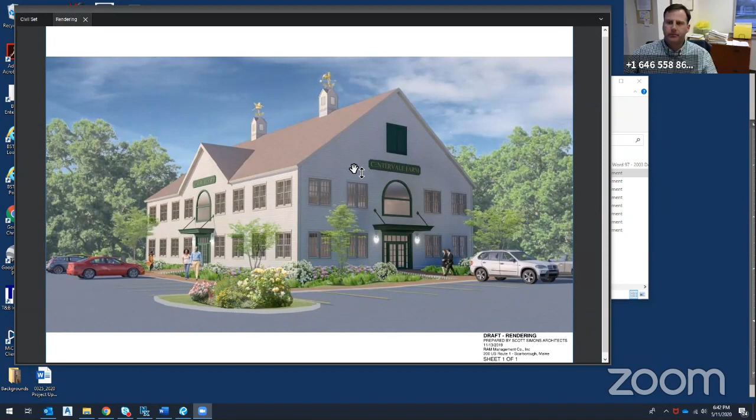Do you see the Centervale Farm building? Yes, we do. Great.

Going through the majority of the changes: the southern drive was previously a full access driveway. We've worked with our traffic consultant and made that a right-in only, configured so no one can take a left into the site or exit that way. We've also added a sidewalk along Route 1, which we'll get into more, and that's been added to the plans.

This area back here was previously just striped. We've now made it a 4 feet wide, 6 inches high raised sidewalk. On either entrance we added benches and bike racks per the comments. We also extended the screen fence further down per an abutter's request, and raised it from 5 feet to 6 feet.

We've been working with the town engineer and Woodard and Curran on comments related to the stormwater. We believe the majority of those have been addressed, and we did a whole traffic study that was submitted as part of the package.

There are a few still outstanding items and revisions to be made. Some of those are already done, and some we'll get in for the next submittal. One is the stormwater comments — we believe those have now been addressed, not on the set you have, but we've continued working on it since. For elevations, color and material will be added to the rendering.

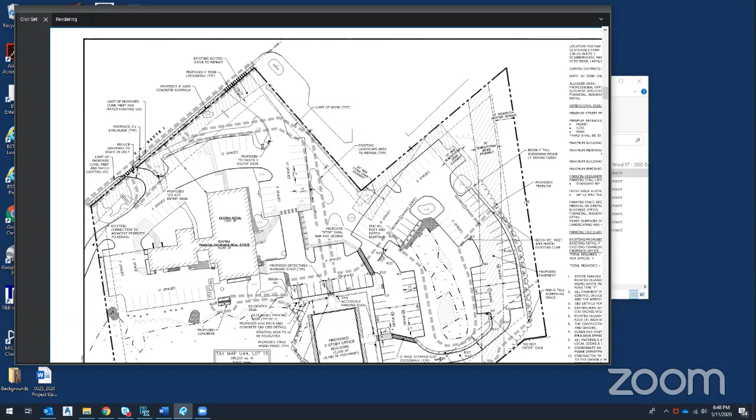People have been doing it from the existing building since it was built in the early 90s without ever having an incident. The number of additional people joining the other building and the additional cars and traffic in and out is unlikely to create a problem if we stripe it properly, which we'd be prepared to do.

All right, that's my discussion. Thank you. Glad to answer questions, but that's my discussion.

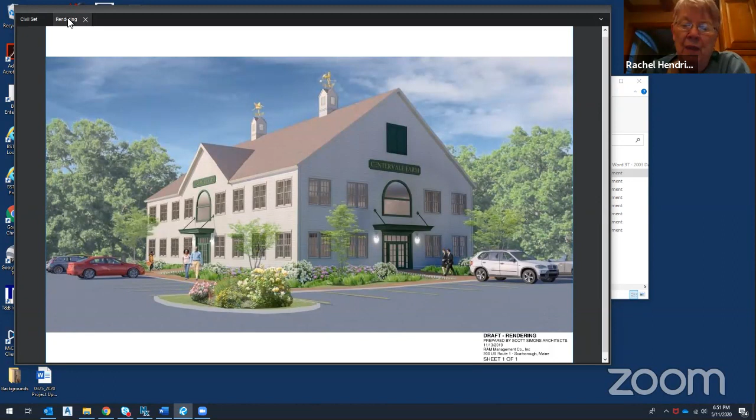That's our intention, to do it exactly the same - the roof materials, the siding, et cetera. Then I think that needs to be mentioned, it needs to be on the plans what it is. I need to see the back and the side of the building, because we do look at all of the elevations. That's all I have.

Thank you. May I ask, Rachel - I thought that was on an earlier plan? We had added a note before, but I believe the board's looking for something on this architecture plan. It's going to call out some of the materials and the colors. Okay, that's easily done.

Roger: Sure. First, I think it's going to be a very attractive piece of property when it's all done, and I like the fact that the building's going to basically replicate the existing building. I want to get a clarification on the access and egress points here, just for my own sake.

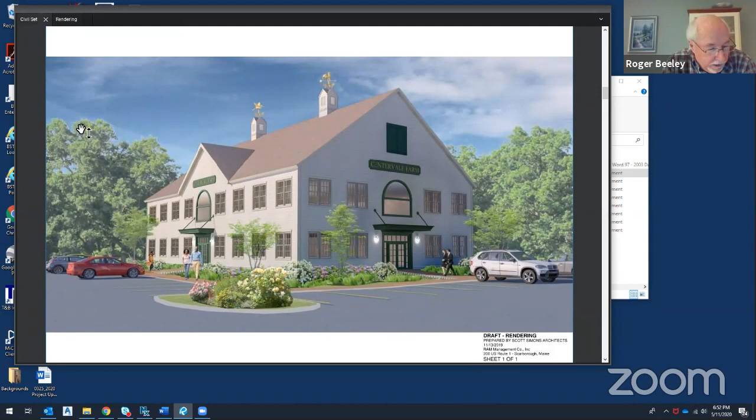I understand the southbound entry from Route 1 is going to be an entry only. The driveway on the northern portion - is that going to be both ways, in and out? That would be full access: right in, right out, left in, left out. Okay, and then the roadway going towards the bank.

Is this interconnection just one way? That is, it's a one-way exit towards the traffic. Okay, and is there signage there right now?

There's an indicated stripe area, and there's a one-way arrow that is maintained. That's not our property, that's the property of the bank and Starbucks, but there is a one-way arrow that was put in when it was originally built by the bank.

But right now, if there are vehicles on your property, they can exit through there. That was a requirement made by the town when they were developing the property next door. Okay, good.

Based on the current landscaping of the existing property, I feel very confident that the landscaping around the new building will be very similar. I don't see any reason why it wouldn't be, but I understand the need to have the information. I guess I don't really have anything further to add.

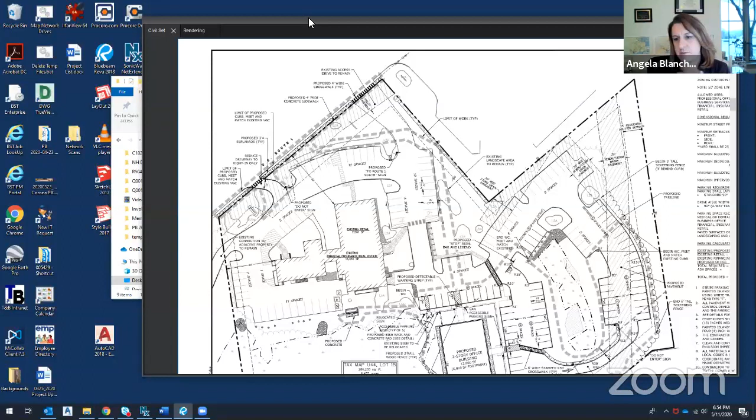Thank you. As John talked about, there are utility poles along Route 1, so he's trying to work within that 7 feet, and as Roger said, they also have landscaping behind that. So I'm sure that's part of the issue too, not wanting to go into the sidewalk easement. Is that part of the issue as well? It's really just confined to the 7 feet, correct?

Correct, there's some grading issues, there's landscaping, there's signage. The thought is, as John mentioned, when you get an esplanade that's less than 4 feet, it really doesn't survive, especially along Route 1, and becomes just dirt. They've spent a lot of time, effort, and money on this property and the landscaping that looks really nice. I'd hate to have a dirt patch in the front.

So one of the things we talked about as staff is maybe, in lieu of having that esplanade, moving that sidewalk along the curb line. The problem then becomes winter operations and the snow plows going down the sidewalk. So in that case, I was hoping we could get to a point where you have the 5.5 foot, face-of-curb sidewalk.

So a snow plow can go down, but then have to bump out, and you can taper it out around some of those sidewalks, so it almost becomes more of a meandering sidewalk, but actually paving that in so you don't end up with dirt patches. Just because of the salt use along Route 1, sand and salt, it's very difficult to keep any kind of vegetation along that stretch.

One question I did have on that piece, maybe for Angela, I'm not sure. The recommendation was to go to an exclusive pedestrian phase for this light due to some conflicts for people crossing from a certain direction, which sounds like a good idea to me for a short-term fix. But I was just curious if there's any thought to what kind of monitoring we might do to that over time, or over a predefined amount of time, just keeping an eye out for the mainline Route 1 functions and whether or not we'd have any ability to tweak that down the road if it turns out to be problematic.

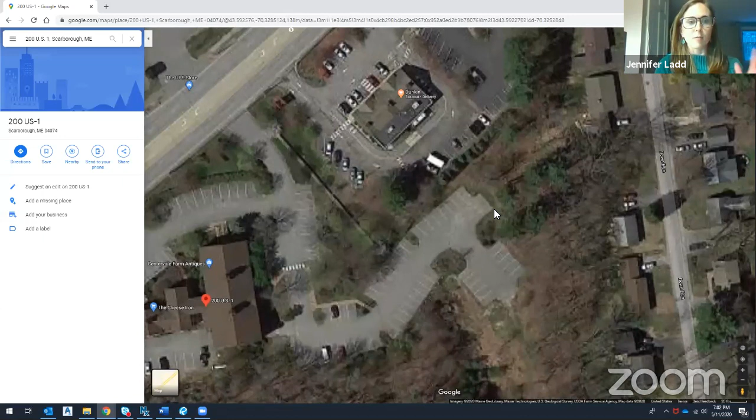So for example, the scenario given is that it's safer to have the exclusive ped phase to allow pedestrians to cross this intersection with no other vehicle movements happening at the same time. That comes at the trade-off of Route 1 functionality, and if someday this becomes a much more frequently used ped phase, that could have longer implications. So I was just wondering, from the town's perspective, or the applicant's, what does that look like longer term?

Yeah, you're right, Jen. We've had a lot of conversations about a lot of the Route 1 signals regarding having an exclusive ped phase or not, and it really starts monkeying with the mobility of the corridor. This intersection in particular, that one crossing for peds has been very problematic, and we've talked about doing a lot of different things. If that's the route we go with, it would be a very short term fix - I don't think that's the solution for that intersection. It's really about trying to make that a safe crossing rather than just stopping all traffic to let a pedestrian across.

So in the background, staff has been looking at this intersection and studying it, trying to figure out a list of improvements that should happen over time at that intersection. It's really about finding opportunities to partner and work with those contributing to that intersection and try to resolve that.

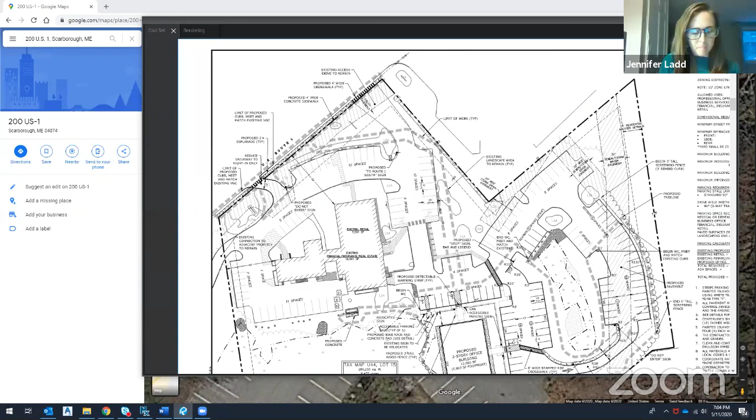The only other thought I had was potentially trying a leading pedestrian interval for a little while, but if you're having extensive conversations about that, I'm pretty sure that probably came up.

The other topic, on the internal sidewalk, I do appreciate the extensive and in a lot of places really mature landscaping on this site, but respectfully disagree that it's impossible or really difficult to construct a safe pedestrian connection out to our major thoroughfare.

I guess I would look forward to it, it doesn't jump out to me on this plan about what your planning scheme or your plan for making that connection is. If it's not a dedicated sidewalk on site, then what is it? This plan doesn't really show that.

I feel like safe and ADA compliant pedestrian access has really come more to the forefront than it was probably in the 90s, or even a few years ago. So it would be, in my opinion, a great lost opportunity in this case to overlook or bypass that opportunity.

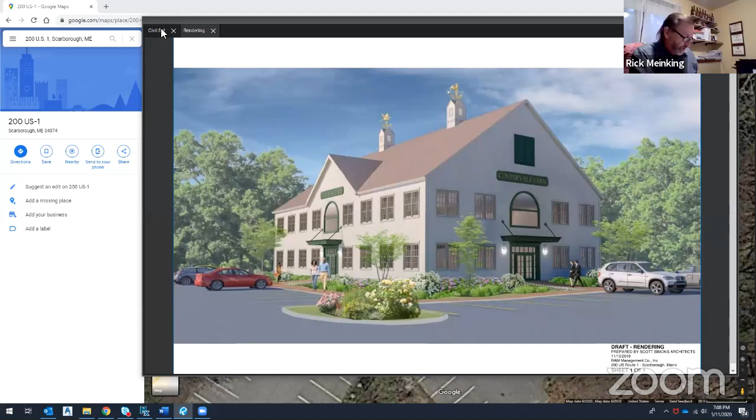you hook into what is existing. I mean, we're talking no candle power at all. And I know we're going to relook at this and submit cut sheets, but we really need to address this, I just don't think you have the coverage here.

And when you do resubmit for your lighting plan, I would ask that you show the interactive effects between this new area and the crossover sections of the existing, because that may be able to solve some of the issue.

I think one of the issues is your lights aren't very high, and they probably are fairly low in lumen output. I don't want to really change the character, but at the same time, I don't want to compromise the safety of those people that are going to enter and exit during the dark hours. So I would ask that you take a real good look at that.

It might be helpful if you add the calculation summaries and divide them into certain areas, specifically the new parking area and the parking area that abuts the proposed building site. Let us take a look at that for the next submission. Okay, that's all.

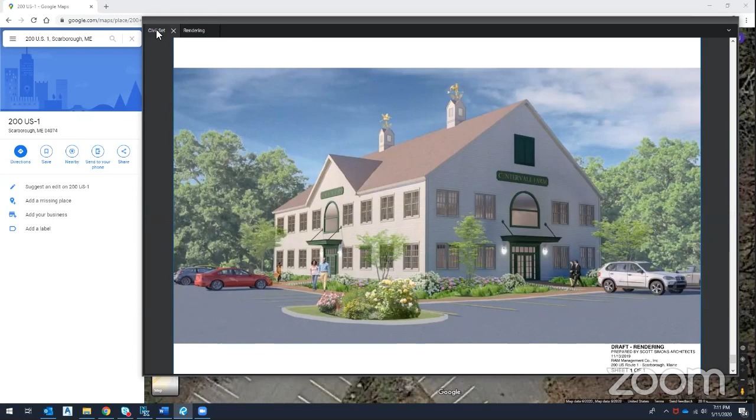John, you speak up as well please, but I think we received the direction on the sidewalk on Route 1, and we will show you at least our suggestion for handling the internal sidewalks.

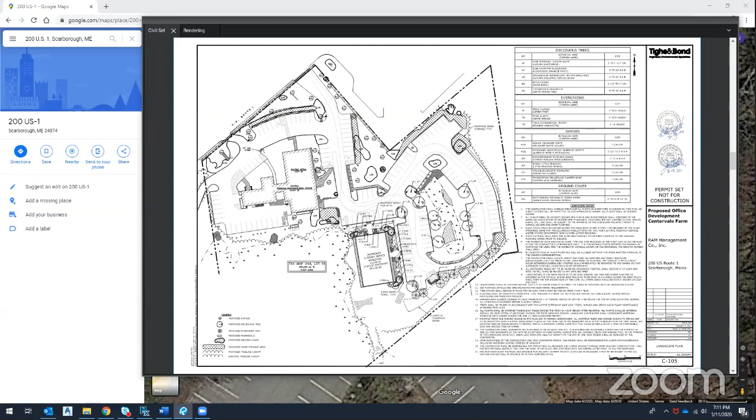I can tell you from having been a tenant of my own building now for almost 13 years, we have a sidewalk that is across from the main entrance to the building. Since there are several entrances to this building, call the main entrance the one on the side of the building, the long side of the existing building. You'll see a brick sidewalk that goes in and out from the parking lot, and then across the way on the opposite side, bricks, steps, etc., that walk up and down.

And people, being—I'm not going to say lazy, people being more direct—tend to just walk right up the middle instead of walking on what's a very attractive sidewalk, which we spent a lot of money building at that time. People tend to use the most direct route, and I think part of it is because it's not a high traffic site.

We actually did submit something to John, but in order to keep our prestigious spot first on the agenda, having missed the last couple of meetings because of the items before us, we thought we would not submit anything before this meeting, as it might have pushed us back on the agenda. So we will submit something for the next meeting dealing with the internal sidewalks.

John, do you have anything to add to it? The only thing I'd like a little clarification on is there's a landscaping comment from staff review saying planting deciduous trees along the northerly edge of the northeasterly parking lot. Is that—I mean, that backs up to the back of Dunkin' Donuts and the barber shop.

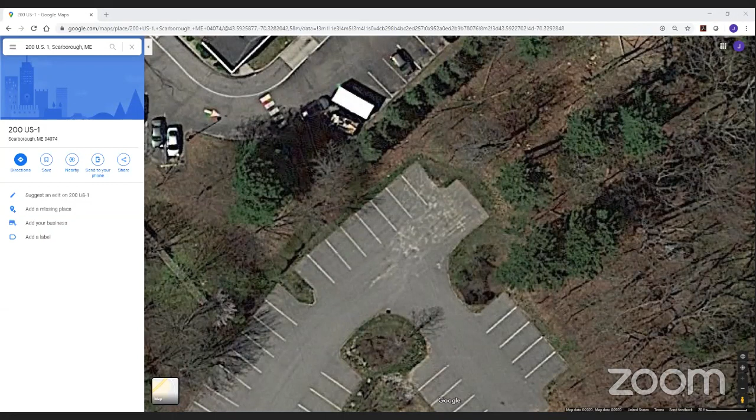Next item on tonight's agenda is LC Holdings LLC, requesting a site plan review for 31 Haigis Parkway, assessors map R50, lot 34D. Jamel?

Thank you, Mr. Chair. This project was also on your last agenda but was tabled due to the late hour. As a reminder, it's located in the Haigis Parkway zoning district, across from the existing Horizon Solutions site. The applicant was granted master plan approval by the board back in February. As a reminder, the applicant is proposing to construct a 4,800 square foot building consisting of restaurant and bar space. The zoning and site plan standards require all planned developments to be walkable and pedestrian friendly. So to this end, staff has recommended the applicant provide a network of walkways throughout the parking area to provide a safe area for pedestrians to walk and provide a pedestrian gathering area. There appeared to be an opportunity to provide some sort of courtyard feature next to the main entrance of the building.

As discussed with the board during the master plan review, the zoning standards require a 25-foot buffer along the Haigis Parkway frontage. The board expressed they were comfortable with the proposed layout of the utility lines, so long as the applicant minimized cutting of existing trees and provided new plantings within the buffer area. Staff recommended the applicant place the gas line adjacent to the underground electric line to help reduce any unnecessary cutting in the buffer, and staff has also recommended additional plantings with varying heights to ensure the buffer strip is maintained.

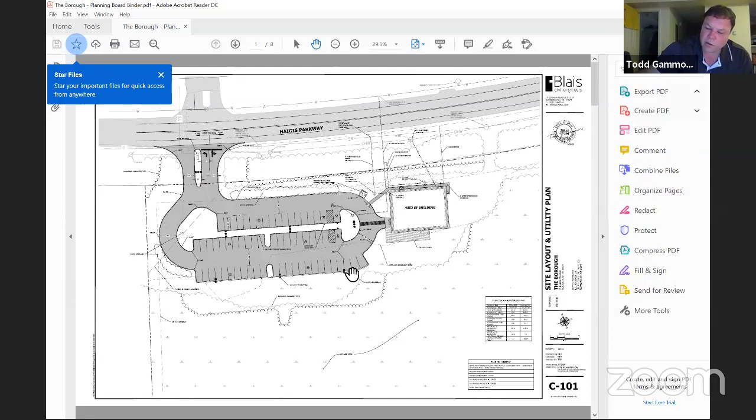As noted during that meeting, we went into quite a few of the site plan details during the master plan, so much of this should be familiar and hopefully more detailed. In terms of location, we are across the street from the Horizon Solutions building on Haigis Parkway, just south of the Foley's Fitness Project, which is just to the north of our parcel. We have a 17.5 acre parcel that was part of an original subdivision approved back in 2006 under, I believe, 3 Diamond Realty for the Haigis Parkway development. So we are tethered to some existing DEP and DOT permits.

The restaurant will be a 4,853 square foot restaurant. We have 64 parking spaces. There's 123 seats in the restaurant. They're going to be open from 11 a.m. to 9 p.m. serving lunch and dinner.

The main focus of the design, as you can see with the site layout here in front of you, was—obviously most people are aware this is the west side of Haigis, or the east side—topography challenges, wetlands, we wanted to stay in the uplands and reduce the wetlands disturbance as much as possible. We also had an easement, this triangular easement that we need to share our entrance with our neighbor to the south, which was lot 8 of the original subdivision. We were lot 9.

One of the other criteria for Haigis was a 25-foot buffer, fully landscaped. Within our 17.5 acre parcel, we have almost 15 acres that we're leaving undeveloped, undisturbed, only disturbing a few acres. We feel like it's an ideal layout for the lay of the land, for being environmentally friendly in the topography and the geotech.

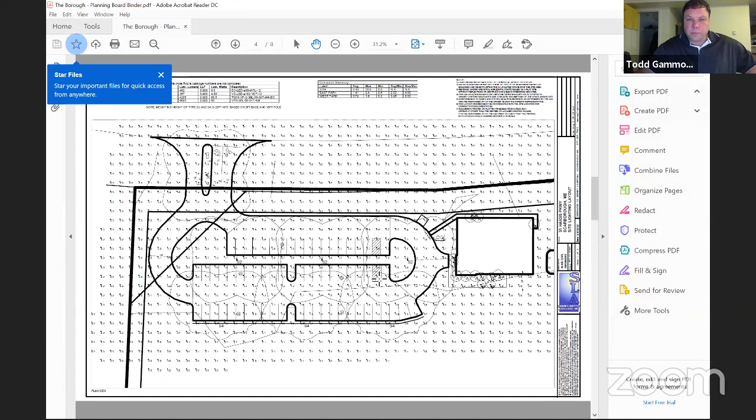All right, happy to, do you have some more, Todd? Yeah, no, happy to take any questions or cover some of the staff comments. Or, yeah, let's see how board discussion goes, and then why don't we start there?

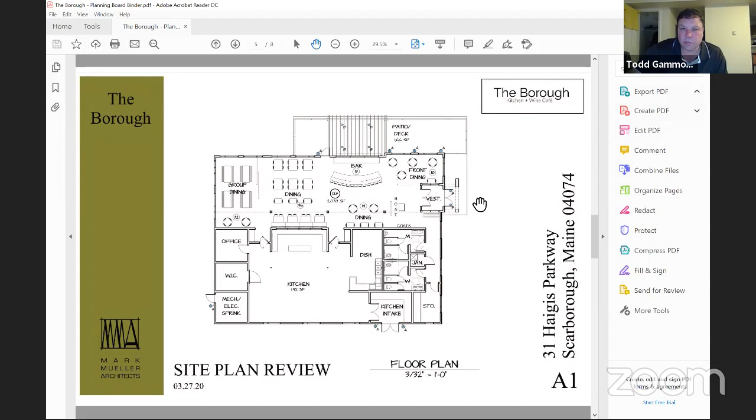Yeah, I have a question on the outside area. Is that dining or is that waiting? Are people going to be eating there, or are they going to be waiting to go to a space inside? This right here is a patio and a deck out back. So here's the main entrance. They can access that from inside the restaurant. So there will be seating outside to the back.

To me, that enters into the question of parking. In other words, if people are going to be eating out there, I don't know if they're just going to take their drinks out there and look at the landscaping. But if there's a planned usage of a certain number of people out there, then I also think the extra spaces are warranted.

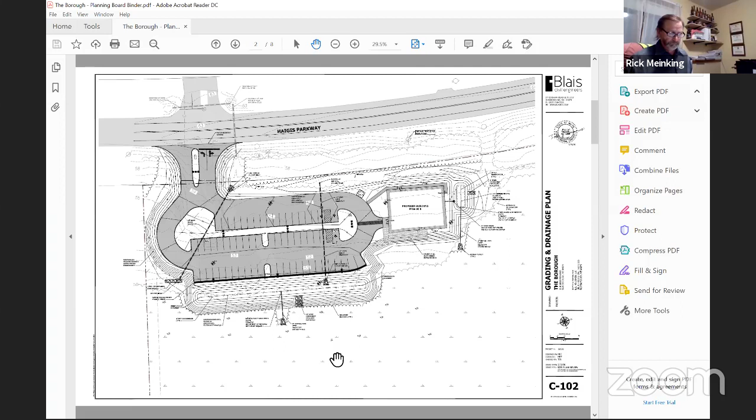I have one question, I may have missed this in the dialogue—is that crosswalk from the building to the parking lot raised as well as striped? Is that a raised walk? No, it isn't. That came about because one of the comments during the master planning mentioned just striping it out, even though we didn't put sidewalk connectivity here to the ADA.

That was more for traffic calming, having some striping across the pavement, so that's flush. As far as traffic movement in and out of the parking lot, I'm assuming both aisles, the top and the bottom, are bi-directional.

So you can back out and pull out at either the lower or upper entrance, depending on which way you want to go. I guess what I'm getting at is if we could discourage people from driving over that crosswalk by backing out, or is this a one-way? Are we planning a one-way traffic pattern here?

No, definitely not, this is two-way, but it's set up so there's less people driving in front of the building—they'll always be able to come in and exit, whether people going down to the lower level can wrap around and head right back out.

Yeah, and I thought that's where we were at with the discussion. I know there's one road in Westbrook that's a nice little cut-through for me to get to Methodist Road, but they put three raised tables on it. Now I avoid it because I don't like driving over those raised tables.

I know it's just a little thing, but it might discourage people from driving in front of the building if they can back out and go the other way. Just a thought—I know Jennifer will probably comment on that next time if she thinks it's a good idea, since she's the traffic expert.

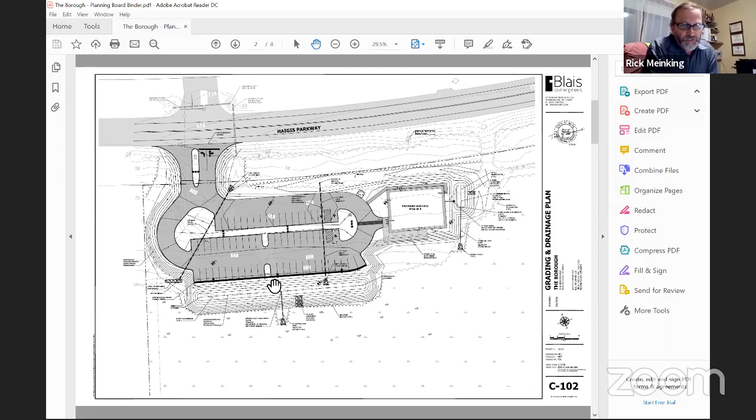And I'm sure, as she mentioned, they have high table turnover to maximize their profits, so I didn't think throwing in that expense would do it. I'd rather see chargers where we can get a good charge on an EV. That's the reason I didn't include that. Yeah, that makes sense to me.

I just figured, I didn't know if you had thought about it. I should have known you would have. That's the second thing I look at. Yeah, I understand. All right, so

I guess that's all I have on this one. I do really like the design and the layout, and I think you did a great job. I look forward to that place opening when we can all actually go out to eat again. That's all I have. Thanks, Rick.

All right. Unless there's any other comments from the board at this time, Todd, are you all set as far as direction for your next submission?

Yeah, just a couple of comments, I guess. We're hoping to tighten this up for the next submission, hopefully get final approval at the next board meeting. One of the things mentioned in the staff review was a bike rack and maybe a seat. I looked at some areas in the front, just so you know, that we could do there. I'm going to work with the architect on the front, and then we'll take note of the mention of the sidewalk here.

The other thing that was commented on, I was under the impression that the apartments had potentially fallen through on the lot to the south, so I'm not sure exactly what would be constructed over there, but we are going to show the dashed line. They'll be able to come in and out as needed, because there's plenty of space, plenty of width for whatever is going to go there. Not sure exactly, there's quite a bit of wetlands, very little upland, so we'll see if anything comes to the board for a site plan application.

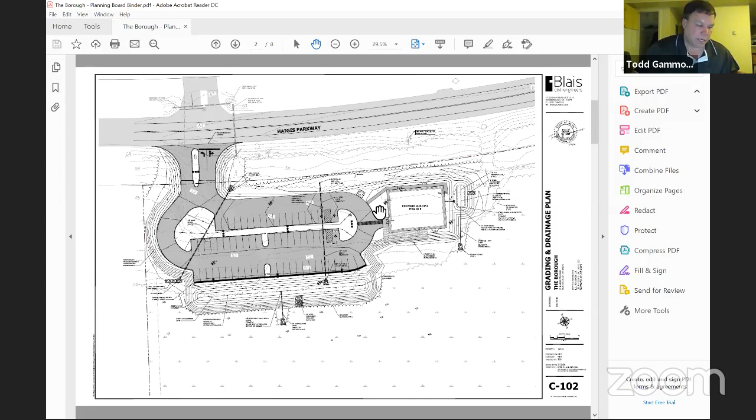The other thing mentioned in the staff review comments, you can see the amount of buffer, and we're adding a lot of plantings. Matt provided a nice photo simulation that you saw earlier. One of the comments was maybe providing one from Haigis, and I just wanted to get some added clarification on whether that's needed. Our landscape architect went out there and mentioned that in the summer, this is going to be very well developed. It's probably going to be the most hidden building on Haigis Parkway. I wasn't sure if that was really necessary to give you an angle from Haigis of what that building would look like, because I think we'd just be looking at a photo simulation with trees. So I wanted to get clarification on whether we really felt that was necessary for the next submission.

Thanks, I mean, I'm comfortable with what I'm seeing at this point. I don't know if anyone else wants to jump in. Jamel, do you want to clarify that at all for us?

Yeah, sure. So it's in the zoning ordinance that all development within the Haigis Parkway should be depicted as seen from the public way. But if the scale or unique development doesn't warrant it, the planning board doesn't have to require it. I just wanted to mention that it is a standard the board typically looks to, but again, based on the characteristics of the site, the board can decide it's not necessary.

Thanks, Jamel. Any board members feel strongly we need the picture of the trees? I mean, the salt pump, you can't see the salt pump real well either.

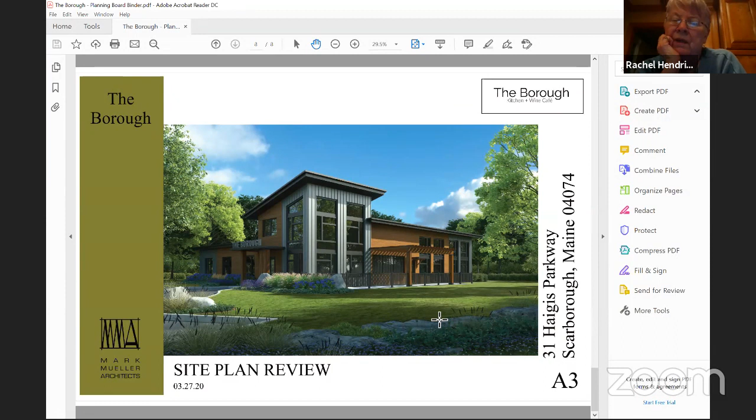So Rachel? Yeah, I think I was the one that originally talked about that when there was a question about whether the utility lines were going to have to go down and come onto the site from the access road, from the driveway, rather than directly across. My suggestion was that you just take a couple of pictures so that we would have a sense of what that coverage looked like.

And do you feel a couple of pictures, and the rest of the board, a couple of pictures will do it? I think that's all that's necessary, just to make sure. Now that the leaves are coming out, certainly we would be able to get a good idea about the screening in the spring and summer and into the fall, and in the winter we get a lot of visibility. We understand the leaves are gone and a lot of buildings are visible, but it just seemed to me to be a way to assure the board there was adequate screening already, rather than needing to add something more. So my suggestion was a couple of pictures from the road. Take your cell phone out and show us what it looks like facing where the building would be, and that would satisfy me, I believe.

Thanks, Rachel. I'd agree, just a photo. I don't think you need anything too elaborate there. It's also, in my opinion, a shame to hide such an attractive building, but that is what it is.

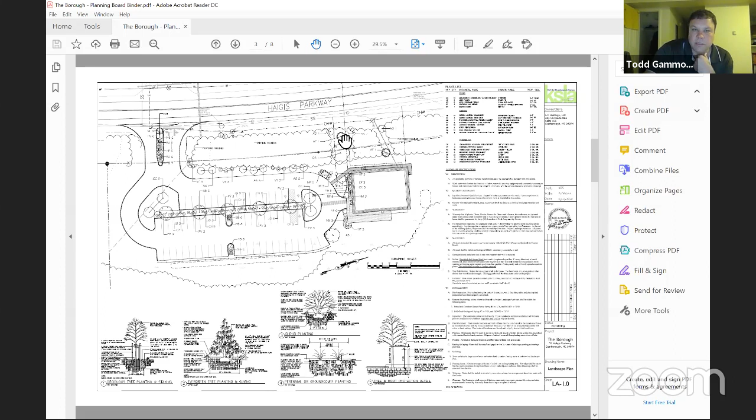And yes, it is a shame to have to try and hide this building, but we did take some pains with the landscape architect to save as much of the trees as you guys mentioned in February. We replanted some lower profile plantings up front, and some trees in back in the areas where the utilities are, so it should provide some pretty good buffer, and we'll get a couple of photos.

One other question that I did have was on the multimodal reserve account to pay in for a potential future sidewalk along Haigis. We were unaware of that, and we were just curious how that came about, and whether someone like Foley's has already paid into that, or if anybody else has, or what the plan is there.

I'm going to kick that question over to Jay. My memory serves me, I think Foley's did, but maybe Jay or Jamel can confirm. Yeah sure, as I recollect Foley's did as well, and that's probably a detail Jamel can remember better than I. But this goes to the site plan standards for pedestrian ways, and the recognition that currently there aren't any sidewalks along the Haigis Parkway.

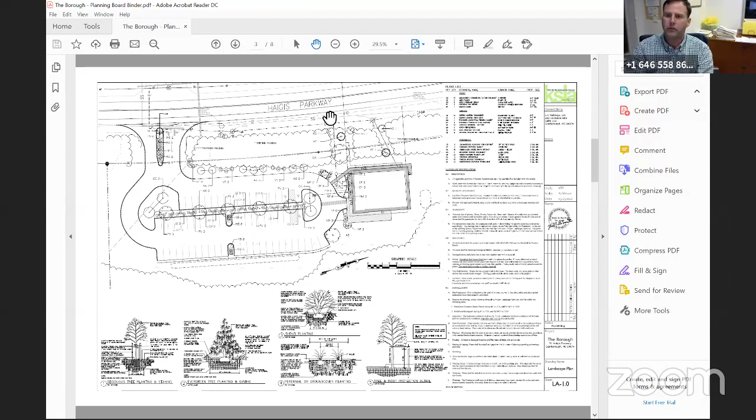So rather than having one piece of sidewalk stand there for an undetermined amount of time, the town, probably 3 to 4 years ago, established the multimodal reserve account. Rather than having a developer build a piece that may ultimately not be in the right location because there hasn't been a fully vetted plan, it can be paid forward towards a future development of sidewalk or pedestrian, or I should say multimodal, because it could be used for other purposes as well.

How is that number determined, and how much is that? Because that's a question I raised months, now a year ago, on how that would work. I think I'll ask Angela to weigh in on how the value is determined. When do we know? When do we find out what that value is?

Yep, oh can you hear me okay? Yes we can, Angela. Okay good. That number is determined by your frontage and the linear footage of your frontage, and we look at what it would cost to build a sidewalk. That typically comes from the applicant's engineer, and we review it to make sure it makes sense. But each parcel is a little different, so that's where we look at it.

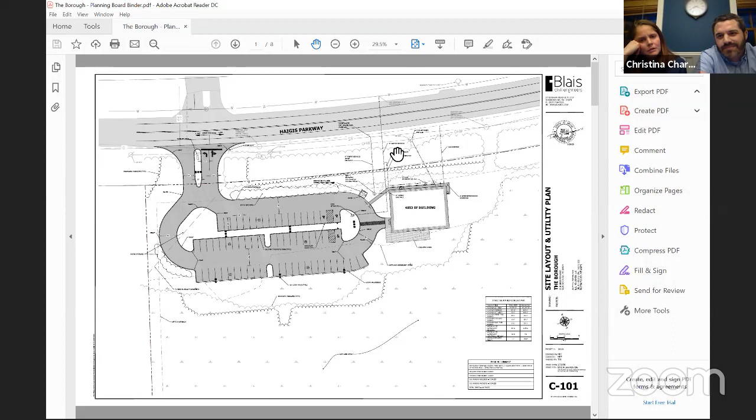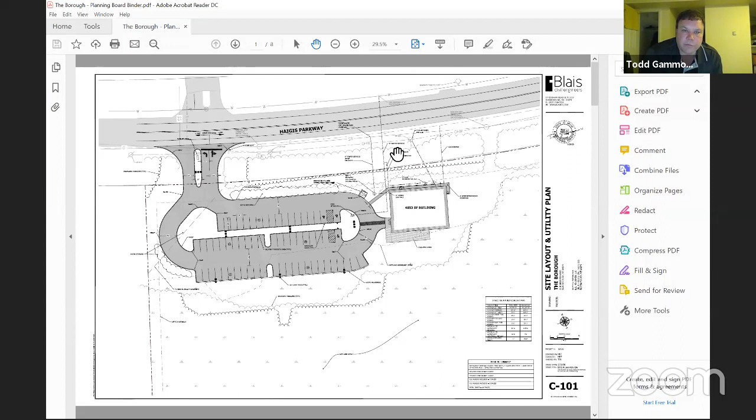Are there any other questions, Todd or staff, before you guys head off to try to wrap this up? I think that's everything I had. Hopefully resubmitting and looking for final site plan approval at the next meeting. All right, thank you very much. It's a great looking project. Look forward to seeing it again.

Great, thank you. Next item on our agenda tonight is 98 Payne Road LLC requests a site plan review for 289 Payne Road, Assessor's Map R52, Lot 4A.

Jamel: Thank you, Mr. Chair. This project is also located in the Haigis Parkway zoning district along Payne Road, directly across from the Ginn Road intersection with Payne Road. As you may recall, the applicant was granted master plan approval back in December 2019, and the applicant is proposing a 13,450 square foot building that will consist of up to 6 storefronts for retail purposes. As you may recall, the town's public safety departments had expressed some concerns about the once proposed full access driveway as depicted on the master plan materials.

Since then, the applicant's team and town staff have met to discuss various site access designs. As a result, the applicant is now proposing 2 driveways along Payne Road, one enter only and one exit only, as you can see on the plans there. The applicant should be sure to discuss this updated design with the board this evening.

Staff did provide a few comments related to internal vehicular circulation, including the addition of some wayfinding signage, some pavement markings, and the possible narrowing of the one-way enter-only driveway to help slow down vehicular traffic. There also appears to be several areas within the site where a town fire truck may hit a curb, so staff suggested mountable curbing where that was occurring.

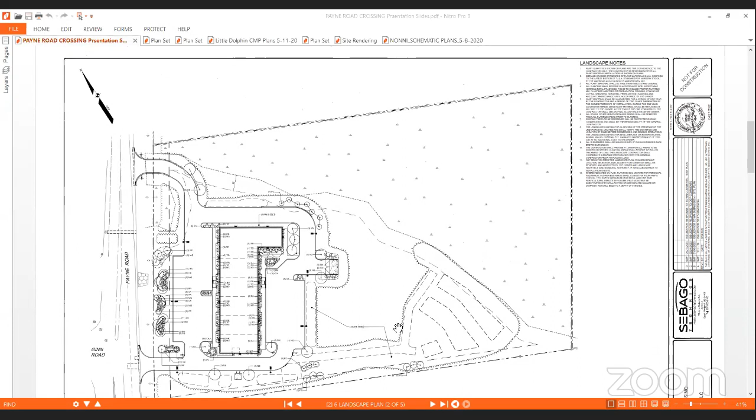The cost is starting to become a bit of a concern for us. As for the back parking lot, we originally had a double row of parking. When we started this process, we were looking at a potential restaurant, which led to that second row of parking. Then we lost the first lane of parking, and now with the additional driveway to offset impervious area and get closer to the required parking count, we've basically lost that whole second parking area.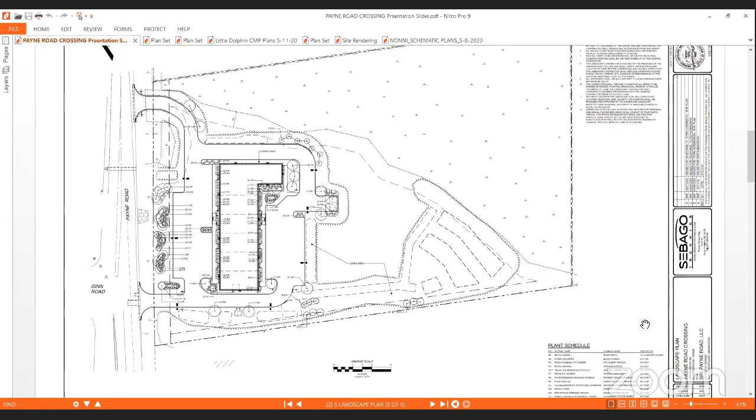For the architecture, we had Port City Architecture pull together some firm plans—thank you, Jamel. I still have my old 11-inch computer so I can't see these too well, but from a color scheme, the brick is on the bottom, working up to clapboards in an earth tone. The top peaks would be white with black lettering for signage, and black asphalt shingles.

The front will have the sidewalk with vertical curbing associated with it. Mr. Chairman, I think we're comfortable with everything else—we see these as mostly cleanup items. We appreciate staff's time in the past; they spent quite a bit of time with us coming up with an acceptable traffic solution. We'd anticipate it being a relatively straightforward process to clean up some minor details. We'd request final approval with conditions if appropriate from the planning board tonight, and would be happy to answer any questions.

Thank you very much. Thanks, Sean.

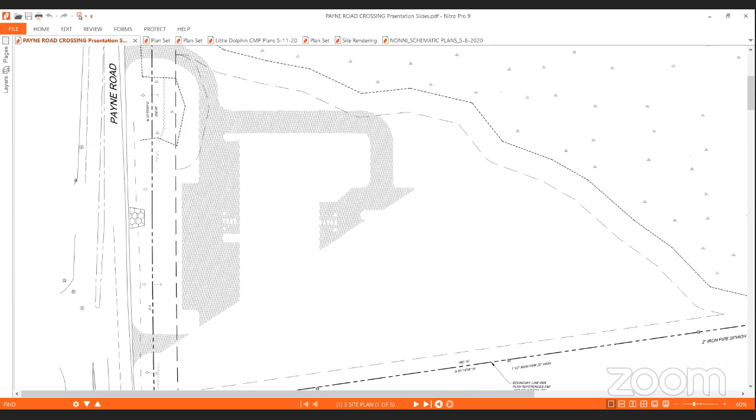I'm just going to throw this out in general. Seems to be kind of just, as Mr. Frank may have indicated, some cleanup. We have seen this plan several times. Do we have any specific questions from the board members? Just go ahead and raise your hand if you want to ask a question.

Roger: Sean, when this was before the board previously, the larger unit, the 4,200 square feet, that was being designed as a restaurant. Could that still function as a restaurant with the reduced parking area, or is that pretty much eliminated?

No, Roger, it wouldn't. The parking wouldn't meet the parking requirements, and a lot of the interior things aren't part of it now either, like the grease trap that would have been outside. I think that was probably as part of our sketch, Roger, when we really started on this. By the time we get to the master plan that Jamel mentioned — December, January — I think we had pretty much given up on the restaurant at that point in time. It was from a lot of different things: the traffic impact associated with it, the work inside and how much work was required to create the interior space, and again, all the parking that we were talking about.

So this is just going to be retail space, retail professional office. What we seem to be getting interest in right now is professional services — dentists, eye doctors, and those types of things. Based upon that, we think we can be very comfortable with the proposed parking that's here. We do think it'll be sufficient. And obviously, if there would be a change for that space to come back to restaurant, it would have to come back to the planning board.

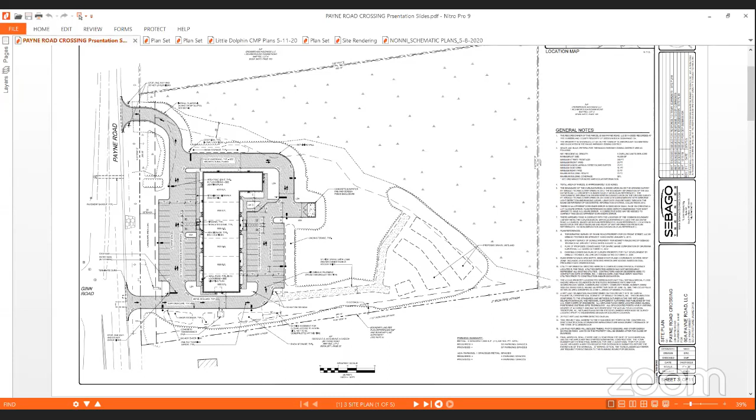Without seeing any other comments, I do have a draft motion here. Nick, going if I could to jump in. Yes, I'm just gonna wordsmith right here, and then share my motion if you give me one second, all right? Okay, sorry, you might want to hurry. Sean might find himself buying something else here shortly. Yes, please hurry.

All right, Jamel, do you have a Mark Loring there available? I just figured it out, Sean. Thank you, there he is. I've been on all night. Mark, my assistant, my child, was not helping. I apologize. Mark, are you good with everything? Yes, I am, Sean. Thank you, Mr. Chairman, I think we're good with everything.

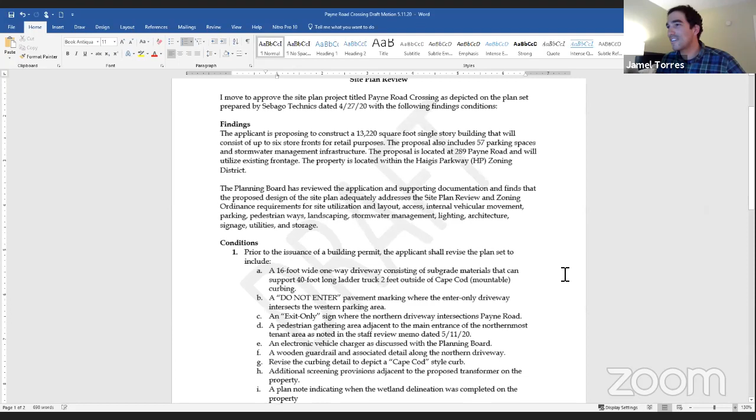We are going to get a little edited version of our motion, and then we'll move forward with it. Can you guys see that? No, I can't, I mean I can see it, I don't know if I can read it. I can zoom in. Okay, that's better, here we go.

I move to approve the site plan project titled Payne Road Crossing as depicted on the plan set prepared by Sebago Technics, dated 4/27/20, with the following findings and conditions. Findings: the applicant is proposing to construct a

13,220 square foot single-story building that will consist of up to 6 storefronts for retail purposes. The proposal also includes 57 parking spaces and stormwater management infrastructure. The proposal is located at 289 Payne Road and will utilize existing frontage. Property is located within the Haigis Parkway HP zoning district.

Planning board has reviewed the application and supporting documentation and finds that the proposed design of the site plan adequately addresses the site plan review and zoning ordinance requirements for the site utilization and layout, access, internal vehicular movement, parking, pedestrian ways, landscaping, stormwater management, lighting, architecture, signage, utilities, and storage.

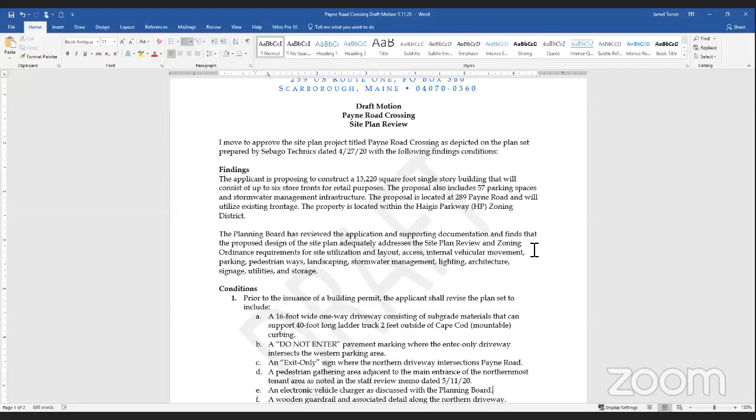Conditions. Number 1, prior to the issuance of a building permit, the applicant shall revise the plan set to include: A, a 16-foot wide one-way driveway consisting of subgrade materials that could support a 40-foot long ladder truck, 2 feet outside of Cape Cod mountable curbing.

B, a do not enter pavement marking where the enter-only driveway intersects the western parking area. C, an exit-only sign where the northern driveway intersects Payne Road. D, a pedestrian gathering area adjacent to the main entrance of the northernmost tenant area as noted in the staff review memo dated 5/11/20. E, an electric vehicle charger as discussed with the planning board.

F, a wooden guardrail and associated detail along the northern driveway. G, revise the curbing detail to depict a Cape Cod style curb. H, additional screening provisions adjacent to the proposed transformer on the property. I, a plan note indicating when the wetland delineation was completed on the property. J, the standard chapter 419 plan note. This shall be reviewed and approved by the planning department.

2, prior to the issuance of a building permit, the applicant shall: A, pay the traffic impact fees. B, pay the in-lieu fee in the amount equal to the estimated construction of a sidewalk along Payne Road street frontage. Funds are to be directed to the town's multimodal reserve account. C, address traffic review comments in traffic solutions memo dated 5/6/20.

D, address the review comments in Woodard and Curran's memo dated 5/7/20. E, address the remaining comments in staff review memo dated 5/11/20. F, provide approval by the Maine DOT for the proposed driveways and offsite improvements associated with the project. G, coordinate with the fire department in regards to turning movements and access. H, revise the building elevations as noted in the staff review memo dated 5/11/20. This shall be reviewed and approved by the planning department.

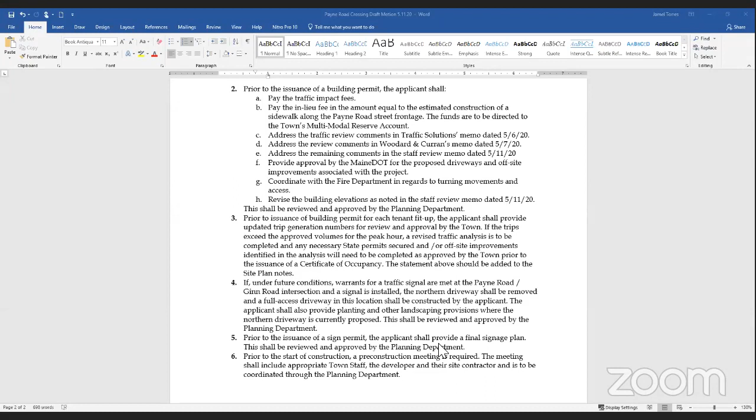Scroll down some more for me, Jamel. Oh, that's all, okay. That is the motion. Second.

Discussion. Mr. Frank, everything you heard in there sound appropriate? Yes sir, we're fine with that. Thank you. All right, seeing no discussion, we'll take a vote.

I'm going to do a roll call. Rick Minking—I'm sorry, Rick, you're an alternate. Rick DePerry? Rick DePerry, I'm sorry, I'm on mute. I'm good, yeah, I agree, that's a yes. Roger Beely, yes. Rachel Hendrickson, yes. Jennifer Ladd, yes. Nick McGee, yes, thank you.

Congratulations and good luck to you, Sean. Thank you very much, Mr. Chairman. Thank you all. Thank you, appreciate it. Good work.

Next item on tonight's agenda: Joy Real Estate of Scarborough 2 LLC requests a site plan amendment for 424 Payne Road, Assessor's Map R38, Lot 11. Thank you, Mr. Chair. So this project is also located on Payne Road at the corner of Payne and Gorham Road and is in the Regional Business, or B2, zoning district.

The applicant is proposing to construct several building additions totaling almost 7,000 square feet to the existing building on the property to serve as a dental office. Staff would like to note that a full stormwater review has not been completed by the town's staff or civil peer reviewer due to missing information in the packet. Information related to the proposed increase in impervious area, disturbed area, and the adequacy of the existing infrastructure on the site to manage runoff will need to be included with future submissions to the board.

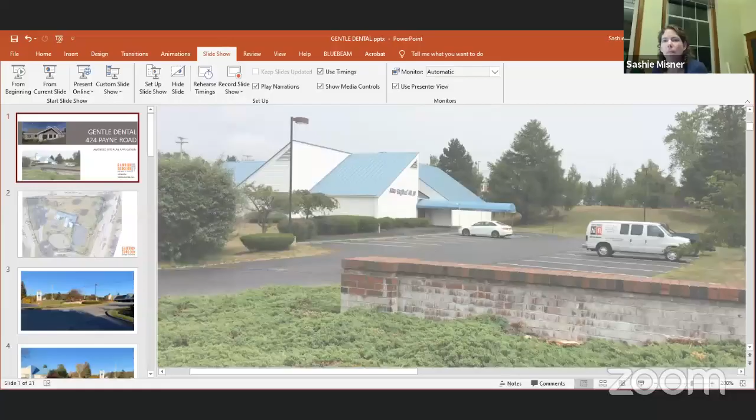So we're here because the owner would like to convert the existing building, the New England Hi-Fi building, into a dentist office. He has a couple of offices in southern Maine and he's expanding, so this is hopefully going to be his new site. I'm sure you're all familiar with this building—it's located at 424 Payne Road, at the corner of Gorham Road and Payne Road. So it's a high profile site.

As you can see from the existing conditions here, the site's contours are much lower from Gorham Road and Payne Road. We have about 10 to 15 feet of elevation change from Gorham Road at this corner of Payne Road. So it is somewhat sunk down at the intersection, and then it becomes more visible as you round around towards Roundwood Drive and this area of Payne Road.

The building used to be New England Hi-Fi. It's been closed now for a year or so, but it was built in 1984. There's been a few additions, so the building is somewhat, you can see from the aerial that it looks like parts and pieces kind of cobbled together. It's kind of a unique building design.

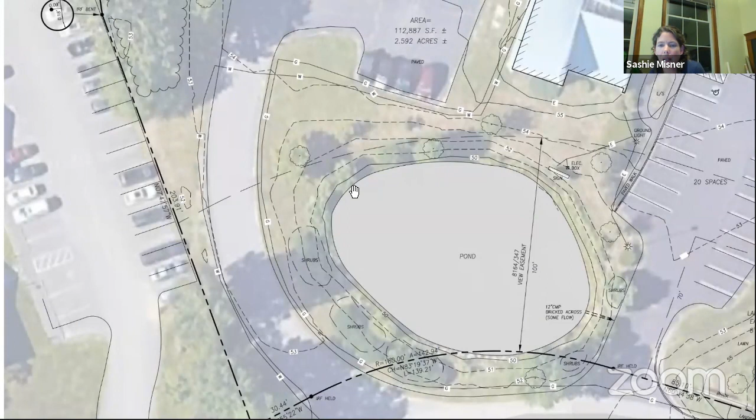Zoom in here. So we have the large directory sign, and there's an easement for that. We have a landscaped easement for the stone wall and Roundwood sign and landscaping treatment right there. And then there's a 100-foot view easement that extends all the way across, offset from their property line along Payne Road. That's a view easement tied to this property that says they cannot plant any trees within this area. So it's somewhat interesting.

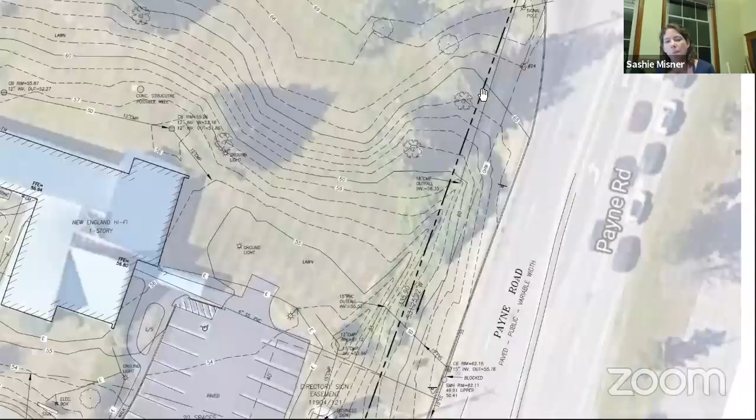They do have some signs on the site. There's the directory sign and the New England Hi-Fi sign located right here. There's an identification sign for the Roundwood subdivision at the intersection here. This directory sign will count as one of their freestanding signs, so they'll then be limited to just one sign that references their building specifically. And there's another identification sign right here for the subdivision.

The property is served by all public utilities, of course. We have electric that comes from Gorham Road to a utility pole right here, and then is underground to the building. We're going to keep a similar approach with underground to the building from a pole with the necessary upgrades as we determine what's needed on the inside of the building.

Water is accessed from Gorham Road. This is, we believe, the domestic service line right now. So we'll bring a new domestic service line from this point, as well as a sprinkler line.

The sewer line comes from Payne Road. We have spoken with the sanitary district and they're fine with reusing the existing line, and we've gotten our unofficial approval of this use.

Unitil comes off of Roundwood Drive, so the gas line comes through here. We will be using a gas service from this location, potentially reusing this one. We don't know exactly until we do some test pits and find out what the condition is and if we can reuse it. There is a water line that comes through here that you can see. We believe this is a sprinkler service that was tied to this portion of the building, which I think was a car detailing service that required having a sprinkler.

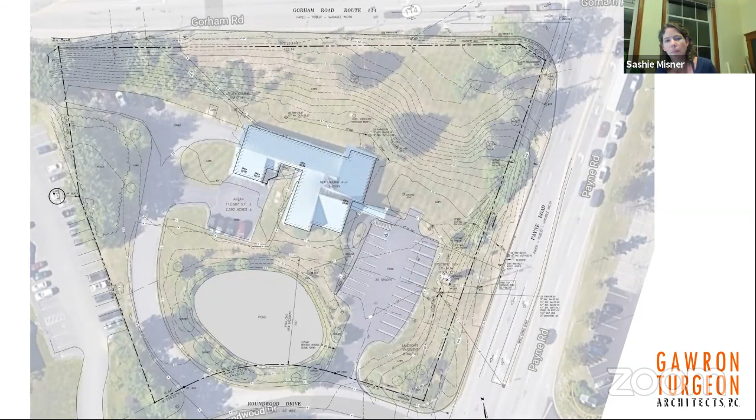There are existing trees and vegetation on site. Some of the trees are not in great condition, so we are proposing to remove a good bit of them and put new trees on site with more of a general overall design for the landscape, instead of what's on site now which is more haphazard. We're looking to create a unified design that would fit with some of the adjacent properties in this neighborhood.

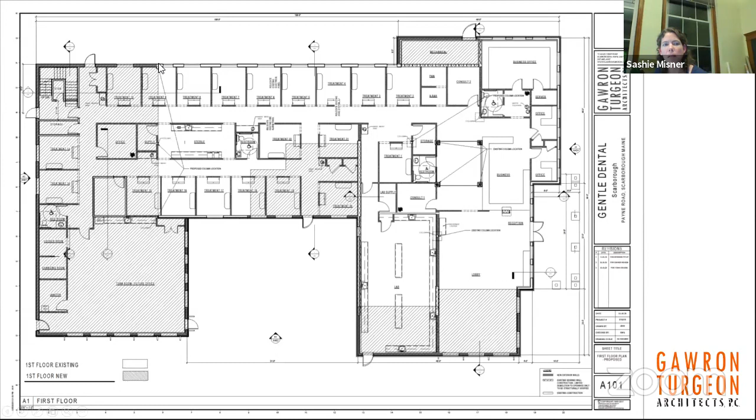And there is a small second floor space for employees. It would be locker rooms or some sort of employee-only space. And then a little cupola.

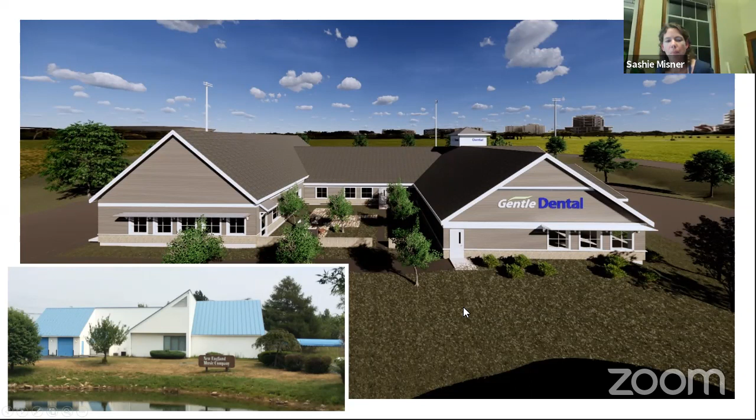Then this is the side from Gorham Road. So you can see that we've kind of animated this roof a little bit with a dormer. We've created the gable roof, and the 2-story will be a little bit more visible on this side, and added lots of windows. So you will have a presence along that side that you don't have right now.

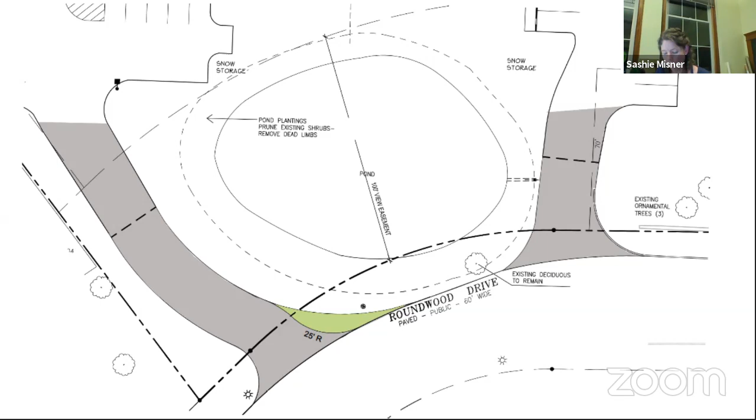We do realize that this one is a bit wider than standard, and we did look at tightening it up a little bit. Here's one option which I like, and I think it works all right—kind of going with the existing curve of the drive and bringing it down and cutting off some of that width. It squares it off a bit, and that's a 35-foot radius. We also looked at even tighter, a 25-foot radius, which brings it right down and squares it off. I thought this one was a little bit awkward, but I think it would still work. We do have a dumpster located over here, so we would have trucks going in here at times. So that's what we'd like some guidance on—which approach you would prefer.

There was discussion about, or a comment about, adding benches along here for seating. Our initial thoughts are to kind of wait and see whether it's needed. We are open to, and have thought about, putting some informal seating in here—like level boulders—so someone could come down and sit closer to the water if they wanted, but it wasn't formal bench seating. We're offering a lot of great seating here for staff, and I'm not sure how much that would get used, so we'd prefer to wait and see how that works.

Regarding the comment to add plant material, the owner has other properties including a dentist office and deals with snow in the wintertime. His preference is to not have a landscaped area in the middle of the parking lot, just to make plowing easier and not have it get beat up in winter. We feel we have a good amount of planting around the outside edge, plus existing plant material we're keeping, and additional plantings. So that would be his preference, to not plant that.

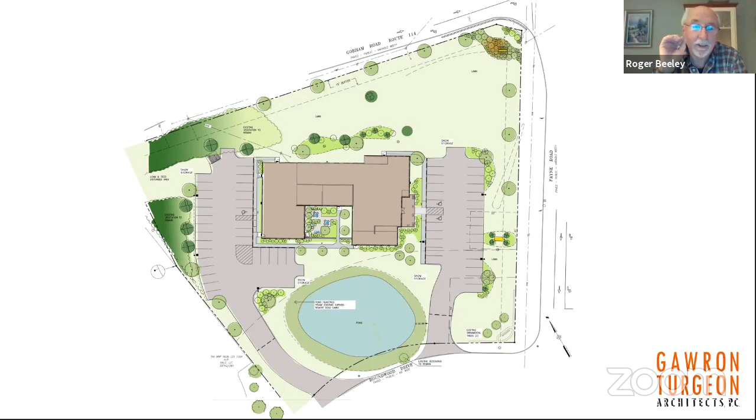I want to weigh in on the idea of a lot of lawn area. I know there's a tendency for people to want to put buffering everywhere, but I think this really looks nice on the corner with a nice landscape lawn area to give you as much exposure of the building as possible. I think the building looks terrific.

Rachel: It's an absolutely dramatic change, and I compliment the architect. I'm familiar with the building, and I had no idea how it could be changed without just pulling the whole thing down, but you've done a wonderful job. I actually like the idea of a couple of seating boulders around the pond as an option. I know I usually say a bench is wonderful, but I think some sort of natural seating allows people to go to the pond if they want to.

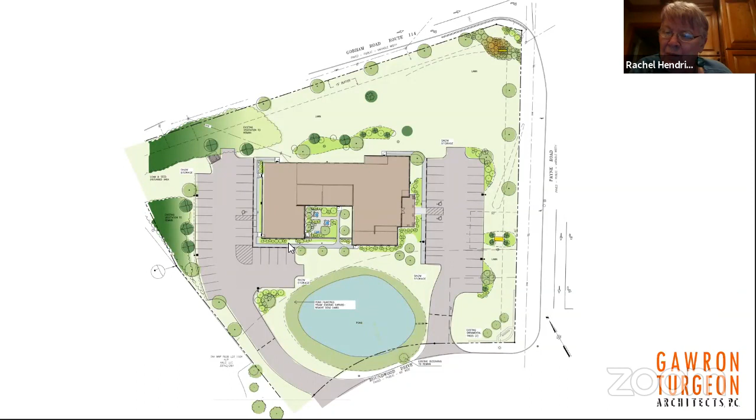It allows them to walk around it. I do have a concern about the sidewalk from the back parking lot, in back of the building. You indicated that at some point that could be overflow for patients, and I see as they come into there, they are going to see the sidewalk that goes down the building, and they're likely to just trot down there and come to what's basically a dead end. So I think that needs to be rethought if you are going to have that for patients, unless they're going to be able to enter through that patio area. Unless you've got that set up, you're going to have some confused folks who thought they could get to the front of the building from that back parking lot. So I think that needs some rethinking, or a very clear sign that says you can go in the back here, but you're going to have to figure out how to get to the reception.

I have a question on how close your parking is to the abutter. It looks terribly close. And at one point in your narrative, I believe you discussed some problems with stormwater from the current parking lot sheeting over into the parking lot of the abutter. Is that correct? Did I see that? No, not as far as we know. There aren't any issues.

All right, I'll have to take a look at your narrative again. I think I made that note. So, how close is that parking to the property line? It's a few feet, so probably about 3 feet.

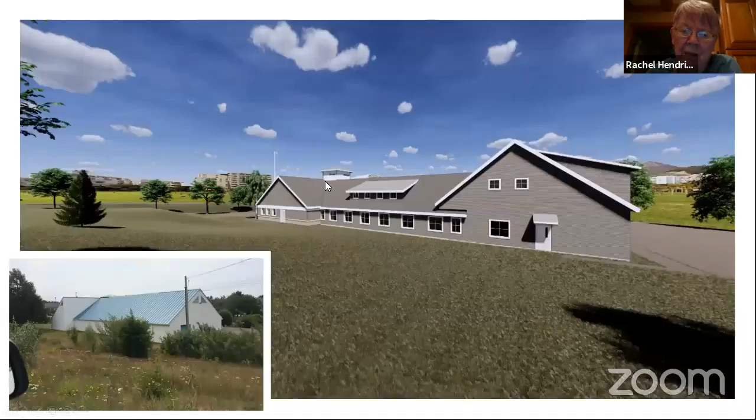Okay, so I guess when Robin comes, she's going to probably want to take a look at that. That's awfully close to the abutter. Have you had any conversations with the abutter on that location of that parking lot? We have not, no.

I think it would be a neighborly thing to do. I also appreciate all the work you've done here, especially what you're looking at in terms of changing the vision from Gorham Road, because as I've traveled down Gorham Road and hit that intersection, it has really been kind of ugly. Your attention to all of the elevations and all sides of the building, I appreciate that and the effort you've put in.

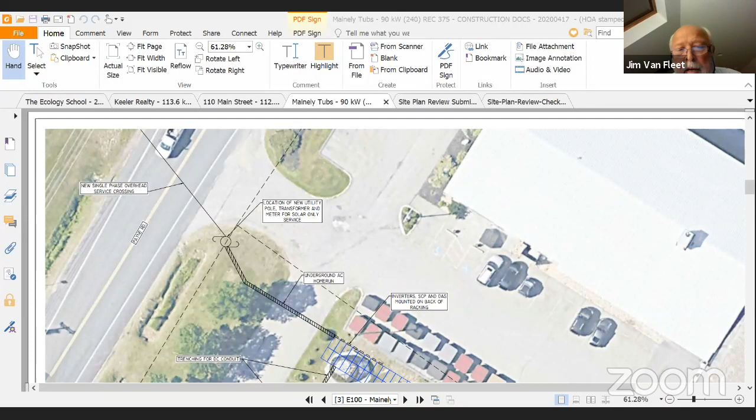For the board member concerned about EV plugins, we have 2 free plugins that will be happening on this site for customers. But this is what I think the wave of the future is — we need to be more self-reliant and reduce our carbon footprint in our building and in the way we present ourselves to the public. So there's a quick introduction for you.

Thank you, Jim. So what I wanted to point out here — I'll switch over to my Google Maps in a second because it's a little easier to see.

The decision to run this new service here — this is the new location of the CMP pole, which will be backed up by, I believe, a 27-foot guy wire. We'll have underground service, a small pavement cut, and we will work to run all of the electrical connections underground.

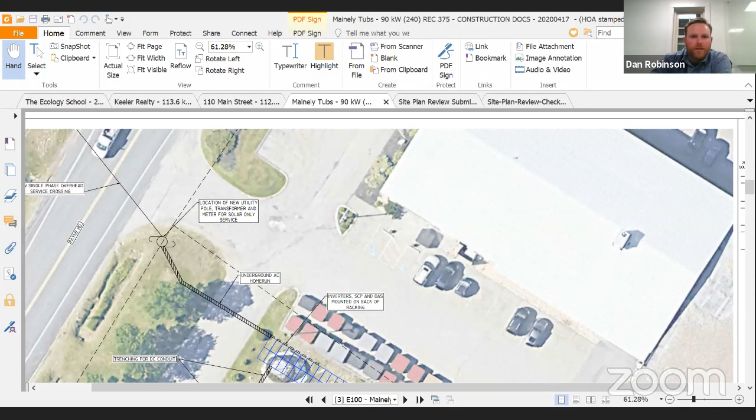The reason I wanted to point that out is here is the property on Google Maps, and in this corner is where the service transformer for the building is. So you can see, for us to basically keep this project viable for Jim, we had to look at installing a pole here, because running underground conduit from this transformer through the parking lot was just not financially practical at that time.

I just wanted to give a little background on that, because I believe some of the interpretation — we've had a discussion previously with Jamal — was something that needed to be addressed here. Through the planning board comments, we've sent the notes to our engineering department, and they are working to add these notes to the plan set. We'd also like to discuss the comments regarding erosion control and any other items brought up by the board.

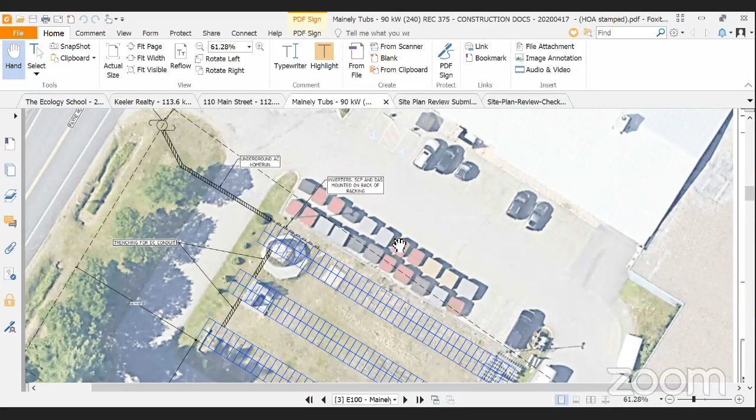Sure. Did you want to see that on Google or just from here, from the plan? This is pretty good. Okay, maybe go back a little bit because we are at 20 Muzzy Road, which backs up to the parking lot on the other side. Here, let me try this a little bit. I'm trying to get a bead on where this is going to be in relationship to my property.

So this is the proposed area here. It doesn't look like there's any impact. Yeah, I don't think we're going to see much impact, are we, on our side? No, we're not proposing any vegetation removal or anything like that.

Okay, yeah, so can you point out again where it is? Because I'm getting a little bit confused. Sure, maybe on the- I see where the array is. I see that. So then I'll zoom back over. So it's just that area there. Yeah, and I'm trying to figure out where my building is in relationship to this.

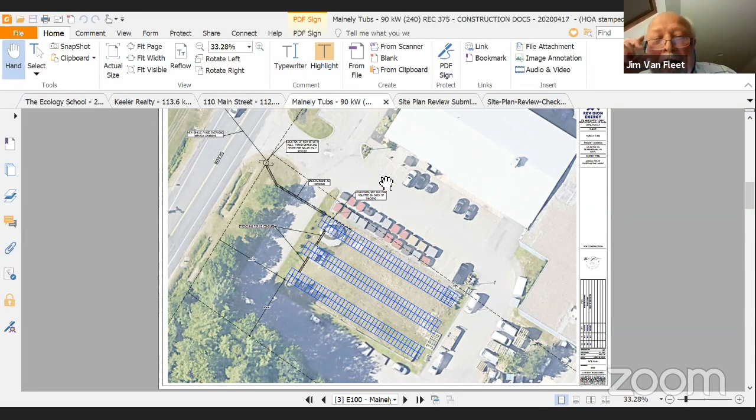Excellent. Well, I support this project 100%, and I applaud you for taking the leap and putting this in. Your partnership with Revision is going to be a great relationship that I'm sure you'll enjoy. And you can always add it on your rooftop to take care of that extra load from all those energy efficient hot tubs, right? Well, we do, and we're both employee owned companies - both companies are 100% employee owned. So it's a great trend there too. Thanks for doing this for Scarborough, I think it's a great project.

Thank you, that's it. Any other questions from the board? We do have a motion drafted on this item. Hey, Nick, I got a few questions. You knew I would. Go for it. This is Rick Dupari.

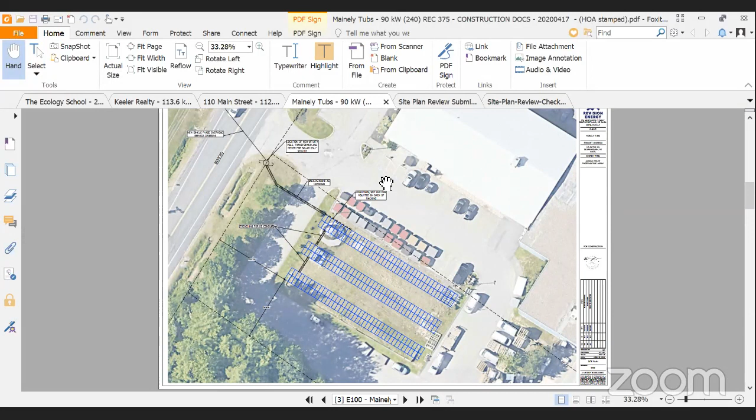I guess my first question is, on that drawing you have there, you have the tubs in the parking lot, and then you have the solar array to the left of the tubs if you're looking from the bottom up. How close is that array to the road or to that parking lot?

Yeah, hang on just a second. Sorry Rick, I didn't even notice your name there. Nice to talk to you again.

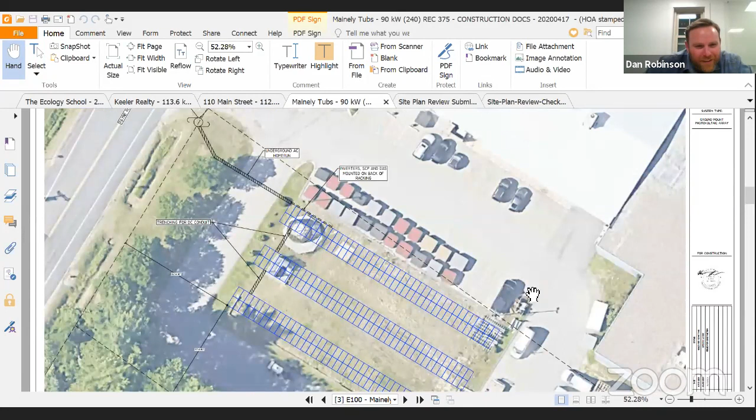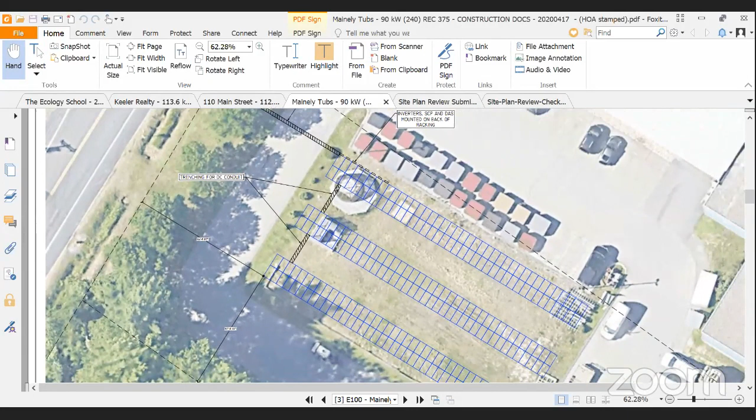That area is not plowed. The snow removal happens well to the south, basically. There's plenty of parking lot where most of the snow removal is pushed in this area. And that's where the drain water is too. So it makes sense, the slope of the whole site goes in that direction, kind of southeasterly. And so that's here, Jim, correct?

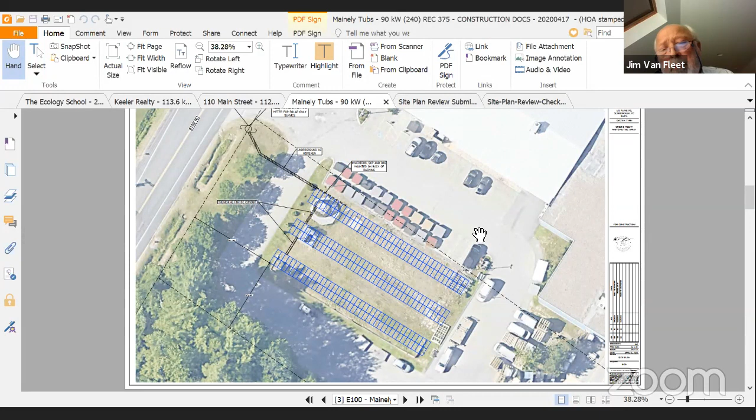Correct. So where those tubs are, are those tubs normally there year round, give or take? No, not at all. This photo happened to be taken during the annual warehouse sale. So we put tubs outside that are refurbished hot tubs. There's a market for that.

I think I was there for that sale. That was a great sale.

There you go. All right, so my concern on that, Dan and Jim, is just want to make sure none of those panels are damaged. And I know this is a great company that you have, and the fact that it's employee owned is a wonderful thing, and I'm sure it's going to be there another 100 years. But if this site was to ever change hands, I want to make sure those panels aren't ever damaged and abandoned. So that was my concern there.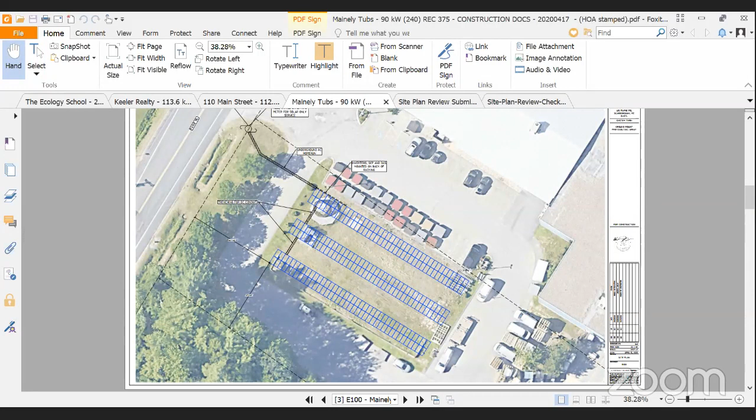Another concern, so you have an elevation called electrical equipment elevation, it's your drawing E300. Do you have that, Dan? Yep, hang on just one second, Rick. Yeah, no problem.

Oh, there you go. So that's showing your electrical equipment, and it's showing the combiner panel and 2 of the inverters. So there's actually, what, 8 inverters on this job? Yes, that's correct. Okay, so that would continue down.

Yeah, so that's going to be 8 feet high. And what's the total length? The total length I would actually have to measure. We can probably calculate it, right? That looks like about 10 feet, 12 feet, maybe right there.

And that's 2 inverters. If you go back to your other drawing, your elevation, you're showing those inverters, but I don't know if it's 1, 2, 3, 4, 5, 6, 7, 8. You may be showing all 8 on your Google Map one. So that apparatus is 8 feet high, and it's probably 30 feet long.

What we're going to do here, Rick, is that along with the ground screws, we end up using a couple more ground screws to build a racking system on the back of that last row. So everything will be contained right in this area on the back row.

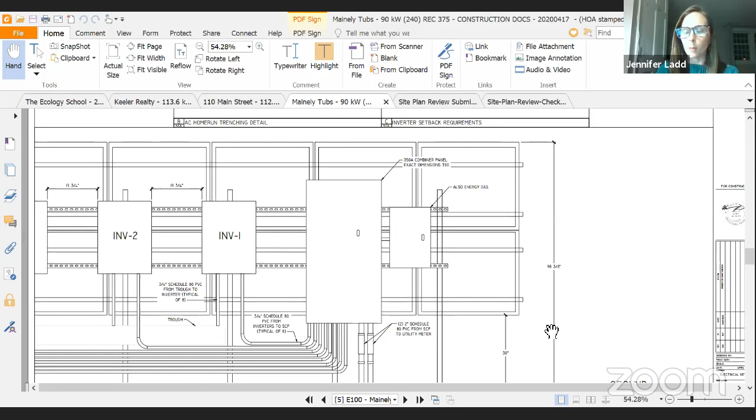I kind of like that, actually. Yeah, that's a great idea. I think that's a good idea, Jen. And it could tie into the inside display. Yeah, with a coating.

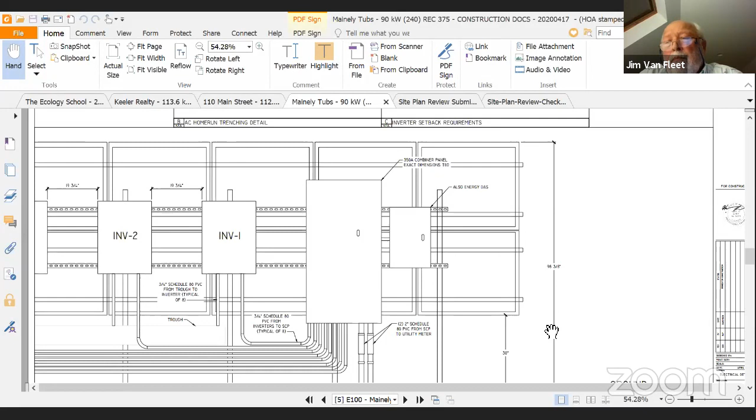I'd love to, because that hasn't been well designed yet, Jennifer. That would be the spirit of what we have to do. I don't know whether we can put that in words as part of a motion, but I'd certainly want to enhance the educational opportunity here as much as we can. I think, Jamel, you could probably do some general provision about signage to be reviewed - educational signage to be reviewed by the planning department. Working on it, okay.

Hey Dan, couldn't you do a nice flat screen inside the tub shop that shows a display of everything happening, almost like the little panel in my Prius? Exactly, and that is the plan - to have that production meter inside for all to view, and then we have the real life example outside.

And I do think that's a great idea. If that's one of the conditions in there, we can certainly work on making sure that's accessible for everybody as they're reviewing the production. I just try to make it as nice as it could be - I don't want you to spend all Jim's money, but if you could use stainless steel maybe for those L brackets and things, something so that 5 years down the road, people are still pulling into your parking lot to look at it and buy a tub. That'd be good, okay.

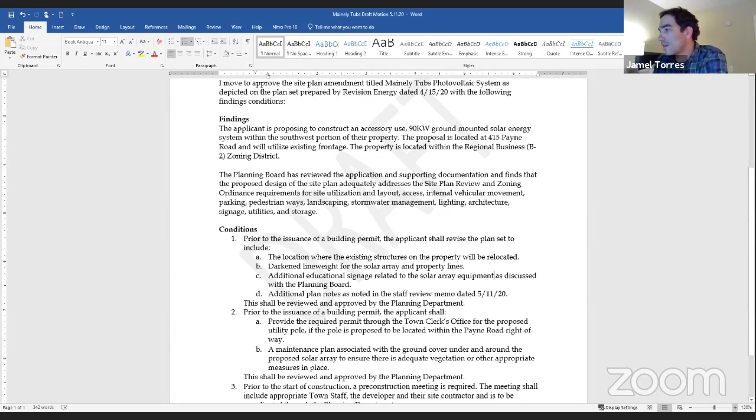So I can zoom in a little more. You read that? We're good. All right, thank you. Yep.

I move to approve the site plan amendment titled Mainely Tubs Photovoltaic System, as depicted on the plan set prepared by Revision Energy dated 4/15/20, with the following findings and conditions.

Findings: the applicant is proposing to construct an accessory use 90 kilowatt ground mounted solar energy system within the southwest portion of their property. The proposal is located at 415 Payne Road and will utilize existing frontage. The property is located within the regional business B2 zoning district.

The planning board has reviewed the application and supporting documentation and finds that the proposed design of the site plan adequately addresses the site plan review and zoning ordinance requirements for site utilization and layout, access, internal vehicular movement, parking, pedestrian ways, landscaping, stormwater management, lighting, architecture, signage, utilities, and storage.

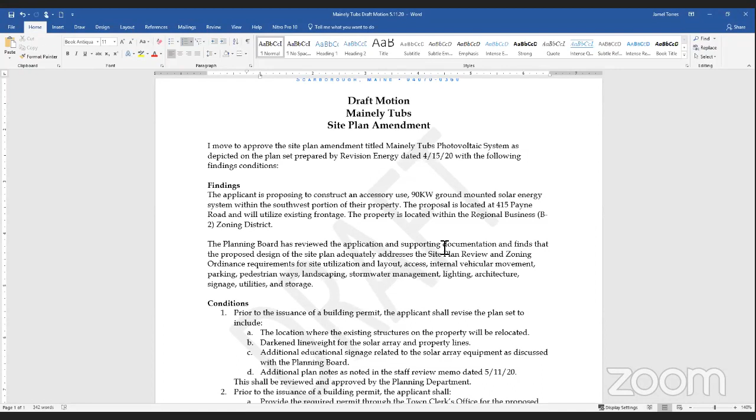Conditions: prior to the issuance of a building permit, the applicant shall revise the plan set to include A, the location where the existing structures on the property will be relocated; B, darken line weight for the solar array and property lines; C, additional educational signage related to the solar array equipment as discussed with the planning board; D, additional plan notes as noted in staff review memo dated 5/11/20. This shall be reviewed and approved by the planning department.

2, prior to the issuance of a building permit, the applicant shall A, provide a required permit through the town clerk's office for the proposed utility pole if the pole is proposed to be located within the Payne Road right of way; B, a maintenance plan associated with the ground cover under and around the proposed solar array to ensure adequate vegetation or other appropriate measures are in place. This shall be reviewed and approved by the planning department.

3, prior to the start of construction, a pre-construction meeting is required. This meeting shall include appropriate town staff, the developer, and their site contractor, and is to be coordinated through the planning department.

Second. I have a motion and a second. Any further discussion from the board?

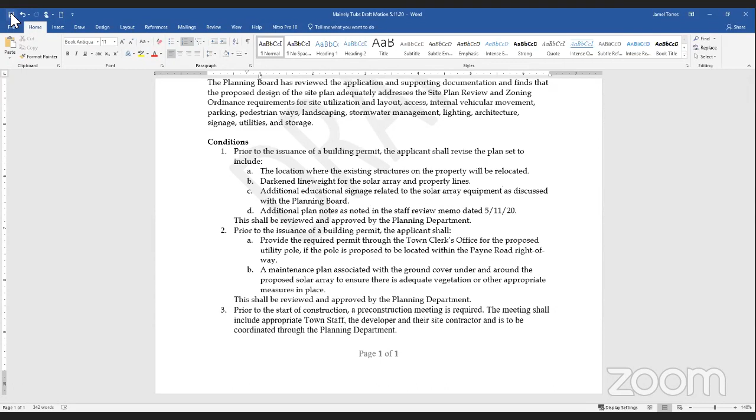Okay, I'm going to do a roll call, and we will start with, I'm sorry, Rick Duperi. Hey, I agree. Roger Beely. Yes. Jennifer Ladd. Yes. Rachel Hendrickson. Yes. Nicholas McGee. Yes.

All right, thank you very much. Good luck to you. Thank you all. Thank you very much. Appreciate it. Thank you. Come stop and learn when we're done.

One last thing, I think it would be really cool when you're all said and done to maybe extend an invite to the elementary school behind you. That might be a quick and easy educational opportunity for them. It could be very quick and easy, but why limit ourselves to the elementary school when some practitioners at the junior and high school level might be even more attentive? Fair, sure.

Thanks so much. Good luck to you. Thank you, everyone. Thank you. All right.

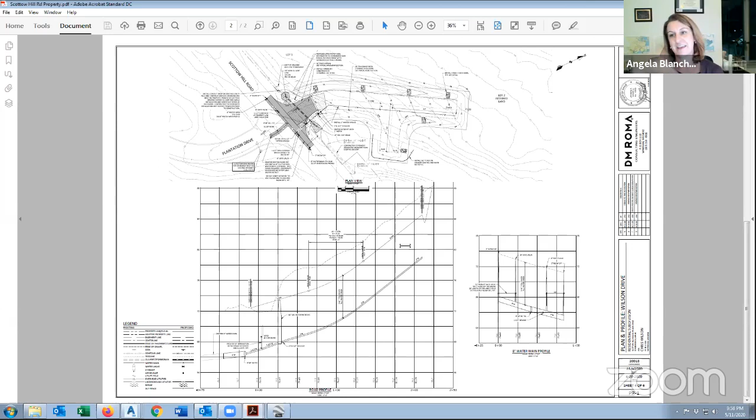And just so the board knows, the K values are really about, I explain them to the planners as the 'thank you ma'ams' - when you kind of lose your stomach going over a crest, or in the sags where you could scrape your bumper, essentially when you're changing that angle of the slope too quick.

It's not an enjoyable ride at a higher speed. Thank you, I'm just going to open this up in general to the board. Does anyone have any questions for the applicant on this?

Jennifer? I'm just curious how far off are you on the K value, and why not build it to town standard, even if you are not intending for the private way to be accepted? I'm guessing based on topography it has to do with earthwork, but I'll let you answer the question.

You're exactly right - the town requirements require 75 feet at no grade steeper than 3%, which brings us to this point here. To lengthen this curve, we'd have to start it at the same location, but lengthen it. So you'd be dropping this grade down to somewhere around here, which unfortunately there's a good amount of rock out on this property. It would be probably another 2 or 3 feet of extra excavation to make the vertical curve meet the town standard. So that was the reasoning for that.

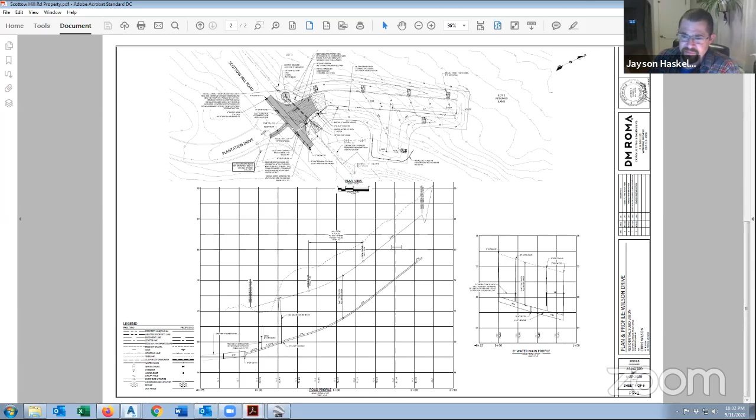Yeah, the documentation's been put together and it's been reflected, I believe, in the real estate document. It just hasn't been recorded, and it's planned to be recorded tomorrow. Chris, or MTR Development, has already purchased the overall 24 acres. It's just the recording of the Lot A conveyance hasn't been physically recorded yet, but the documents are already signed and prepared and ready to go. It's not the easiest thing right now to get something recorded in the registry.

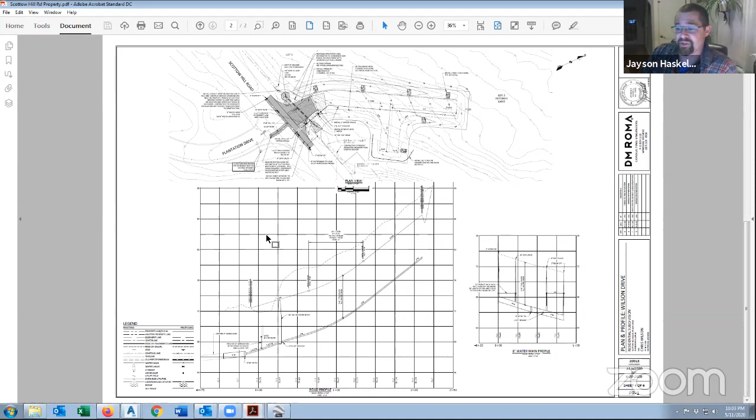So that is the intent, is to have Lot A - like you said, and you and Jamel and Angela, when we've been talking - that it's all a separate lot, but it's all part of the subdivision because it's all within 5 years. So that's where it stands right now.

So we will be able to have that recording data put on the plan sheet? Yep, great. Great, all set here. So, all right - this is Rick, I'm sorry to interrupt.

I know we're running late, but is this just a 3-lot subdivision? I'm looking at 3 lots, and it's hard when you're not right there in person, but I'm looking at 3 lots with 3 building envelopes, and that's what we're giving preliminary approval to tonight - or being asked for preliminary approval to - is just these 3 lots on Scottow Hill Road.

That is correct. And the purpose for the private way is, I believe, it gives lot 2 the requisite frontage. The frontage will be coming from Wilson Drive.

But Wilson Drive, is that the entire road? How long is that road? It's about 200, 220 feet long, I think is what it was.

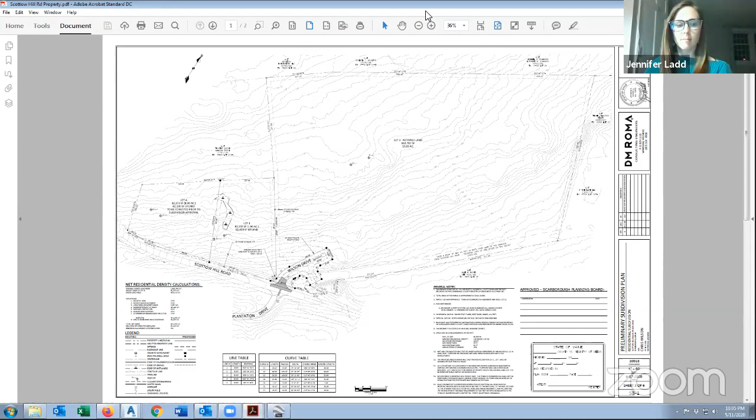I have a motion and a second. I'm going to do a roll call vote. Jennifer Ladd, yes. Rick Meinking, yes. Rick DuPerry, yes. Roger Beely, yes. Nick McGee, yes.

Okay, thank you very much, Mr. Haskell. We will see you again. Sounds good, thank you very much. Good luck to you. Thank you.

All right. So items 11 and 12 will be tabled for the evening. Item 13, can we do a staff report, Jamel?

Sure, I have a few items. As you may remember, the Cottages at Sawyer subdivision plan was approved in February. The applicant did work through the final details with staff for the subdivision plan portion, so we do have the final plan ready for signature.

Unsure how to coordinate that. I'll look to Jay and others at the town hall how we could do that, but I don't know. Do you have any ideas, Jay? Yeah, actually sorry Jamel, I don't think I CC'd you on the email. I emailed the board earlier today and asked them to give the office a call before they come in. Sorry, I left you off that one, knowing you're still working out of the home.

No worries, thank you. But there will be someone here 8 to 4, whether it's, I'm in most this week, but certainly Robin and Doreen are now spending the time they have allotted in the office. So we have general coverage, still not open to the public, just so folks know, but a little bit more staff is back in the office, not all of us quite yet.